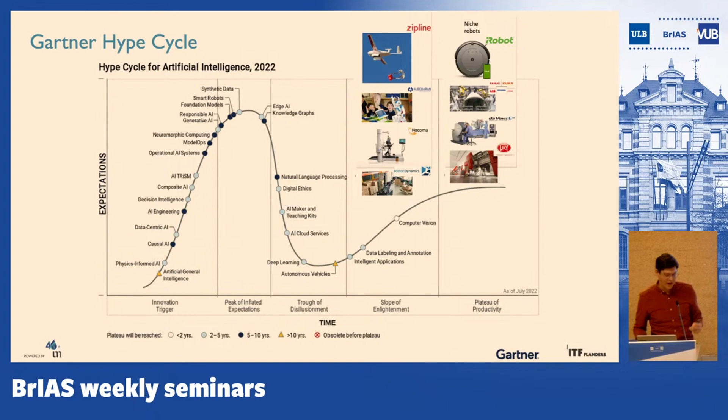And then on the plateau of productivity, I think this is niche robots that can do only one thing. And then you have robots that I think go more to unstructured environments, like drones for transport of things, education robots, exoskeletons for rehabilitation, also warehouse robots, which gradually start to be implemented more and more.

And in the disillusion valley, there I think also the autonomous vehicles are placed. When you see the predictions 10, 15 years ago, we would all drive with self-driving cars. Of course, there are huge advancements there, but I couldn't yet sleep in my car, of course.

But also exoskeletons, cobots, quadrupeds - I think we still need to see the true value of them in our economy and society. And now more and more you have the humanoid robots.

There are incredible investments in them. Hundreds, thousands of millions are now pouring into it because they see it after text, speech, images, videos - it's probably physical AI. And so that's really where a lot of investments are made. But I think it's really on the peak of inflated expectations.

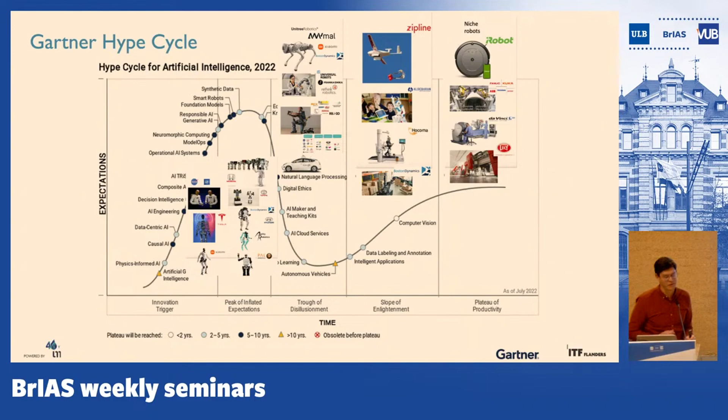So what are the core technologies in such a humanoid?

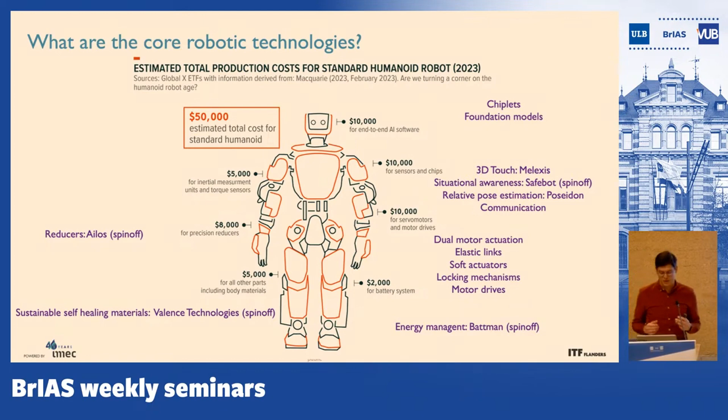So here you see end-to-end software which needs to run on chips. What's there? The foundation models, the chiplets, because we need new processing to make low latency, low power processing for sensors and chips, 3D touch - I'll speak a bit about Melexis - situational awareness, communication, but also servo motors, a big part of the value, the battery system, the body materials, precision reducers, inertial measurements, and so on. But of course, to produce that, you need very large multidisciplinary teams to develop it.

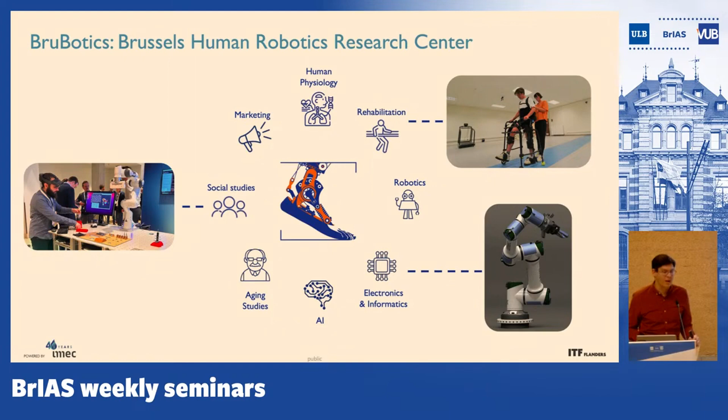That's why we developed at VUB Brubotics, a combination of different labs, like the AI lab, but also electronics and informatics, and our robotics research group. Because the combination with the human is important, we also introduced human, social, and medical sciences into it. This umbrella of different research groups, which before mostly worked on human-centered robots, has now expanded to sustainable robotics, working closely together in different teams.

Moreover, we're affiliated with Flanders Make, which is an institute for helping the Flemish manufacturing industry. I was part of Flanders Make until a while ago - now it's a colleague of our lab, Ilias - and I joined IMEC. Why? Because they're the chip research lab of the world, and I see a lot of opportunities that those developments will also end up in robots and have markets there. That's why also the focus on

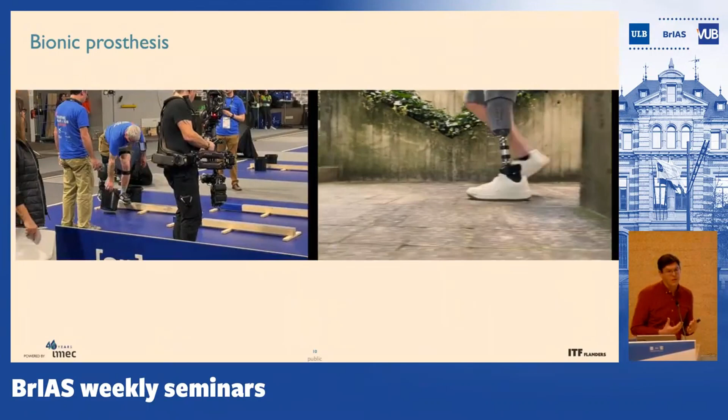core robotic technologies. I mentioned we're going to startups, and one that already exists for a few years was founded with someone from the AI lab, makes bionic prosthesis. There we started with the focus on how we can improve actuation technologies, because typically motors for robots are very rigid, very stiff, and how we can go beyond that and include the flexibility of the human body to store and release energy in springs, for example for bionic prosthesis. This is the company Axiles Bionics, who has the IP on the ankle, on the bionic foot.

Others in the lab are also working on the knee prosthesis, and here, for example, we participate in Cybathlon, which is kind of an Olympic Games for persons with a disability, helped with technology. Now we're also trying to transfer the IP of the knee towards Axiles Bionics. So here too it's development of hardware innovations, control of it, model-based control, but a lot we cannot model, and therefore AI is also important.

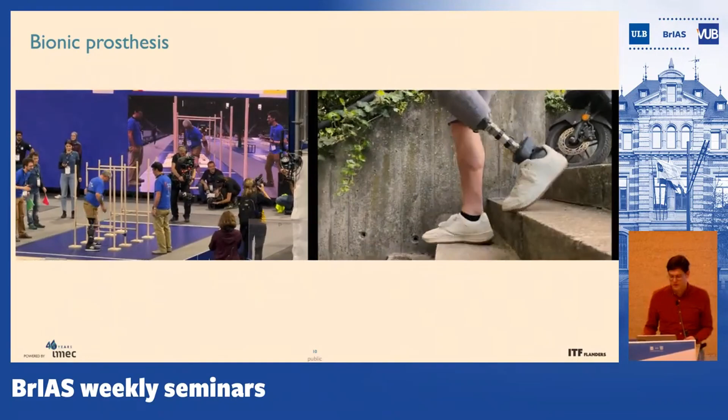Instead of replacing human limbs, we also try to augment human limbs - the so-called wearable robots, in this case exoskeletons, categorized into two main families. On one side you have the very passive devices - basically springs that store energy to pick up something, and that energy is released back into the human body to support it. But if you want to do other motions, they often hinder that motion, so they're not very versatile. On the other hand, you have powered exoskeletons, with batteries, motors, and controllers, which of course add weight to the human body.

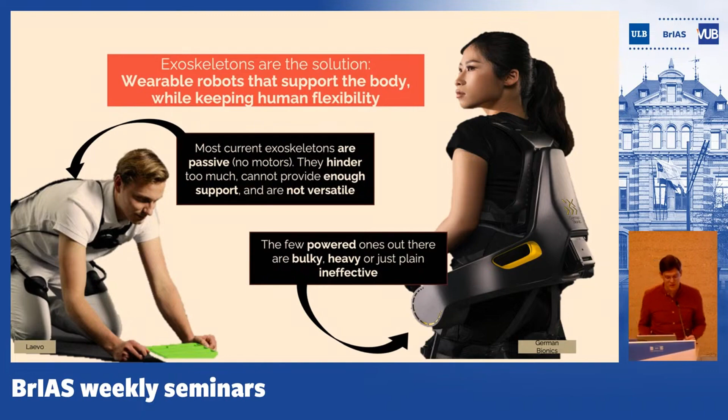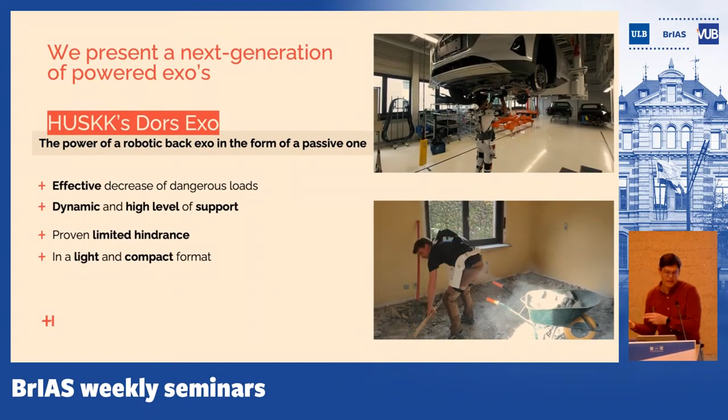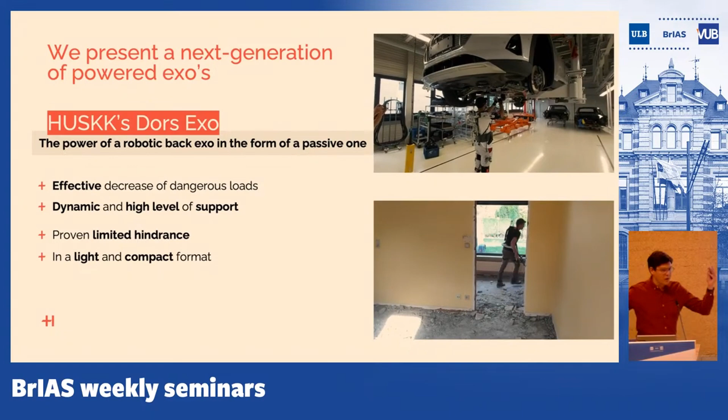But they're also very bulky and not very effective. That's why, similar to the prosthesis, we try to combine passive behavior - storing energy in springs - with active motors where needed, to make much more lightweight but also versatile devices. Here you see, for example, such exoskeletons for the upper arms. Think how painful it is to paint the ceiling of your room - but a lot of workers have to work, for example, under cars and so on, also to lift heavier objects. Here too we want to try to make a spin-off company out of it, called HUSKK.

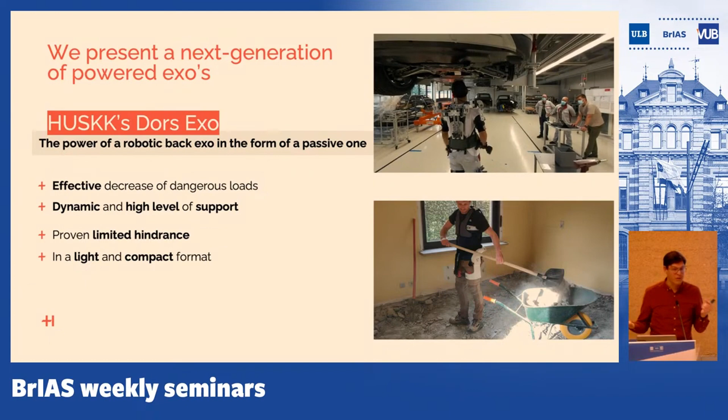But it's hardware, and hardware is hard - it takes of course much longer time to market than software. On the other hand, there is IP involved, which has value. And that is, of course, challenging - we need quite some investment money to bring this to the market. So hopefully in a few years we can realize this.

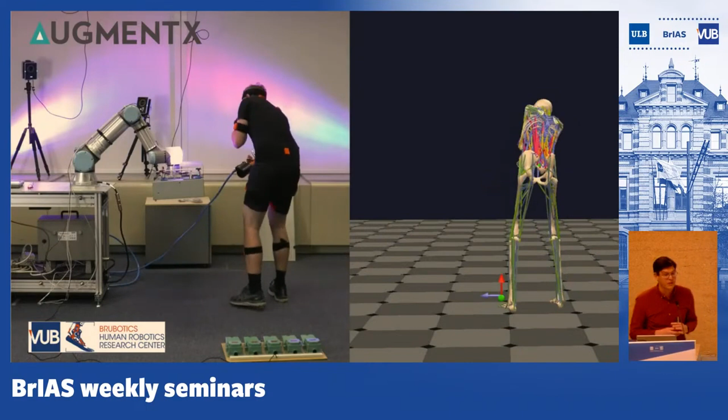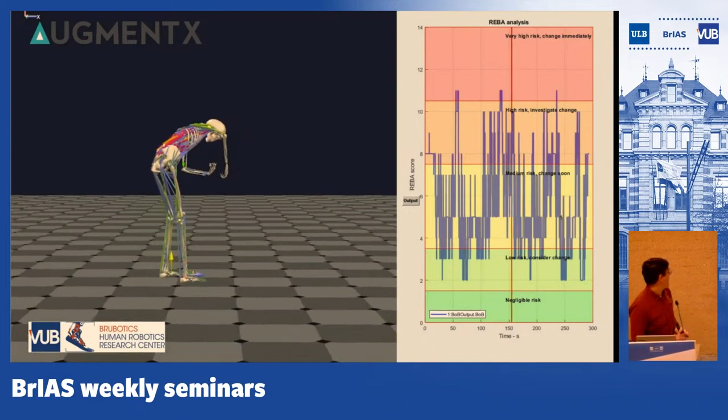Of course, to test our devices, we need labs to do that, to understand the impact on the human body with human physiologists, but also the social acceptance of those exoskeletons - that's also why we work together with sociologists on it. We have about a €1 million lab supported by Flanders Make, with motion capture systems like Vicon, but also wearables, insoles, force plates, and so on, so we can objectively investigate the impact of different exoskeletons, but also cobots, as you see here, on the human body.

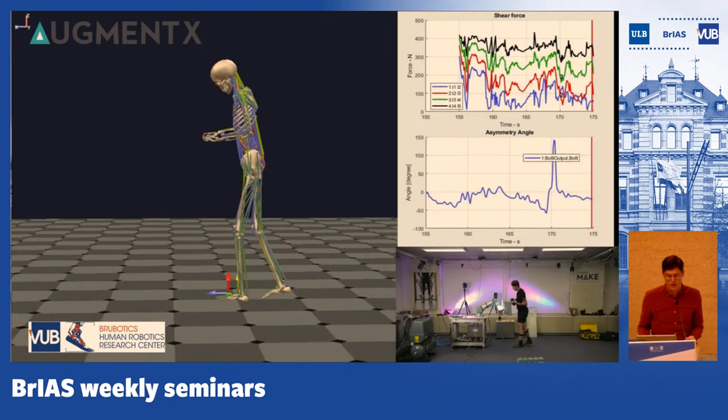So in the drivetrain, we investigated a lot of locking mechanisms, springs, and so on, but also the gearbox is an important component, and Pablo is in the room who leads this venturing effort in order to make exoskeletons. But let's watch the video.

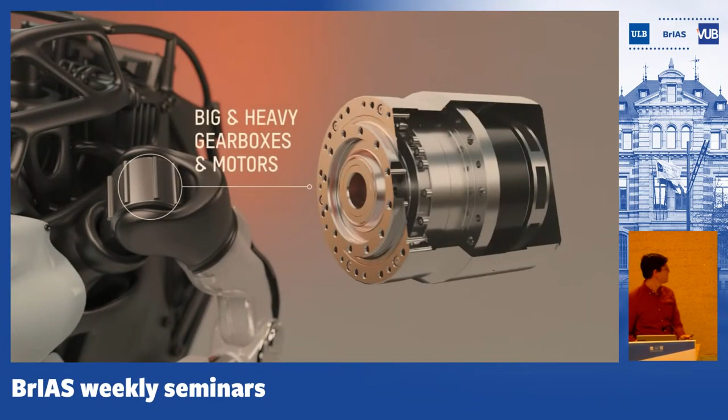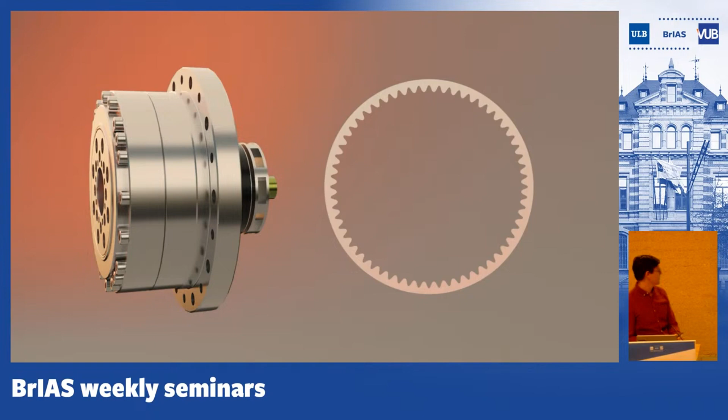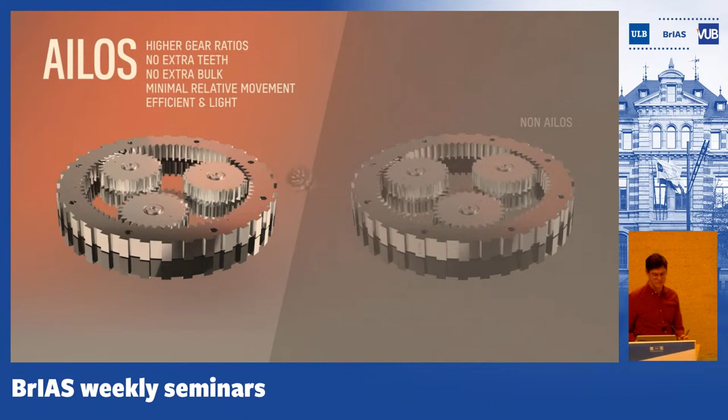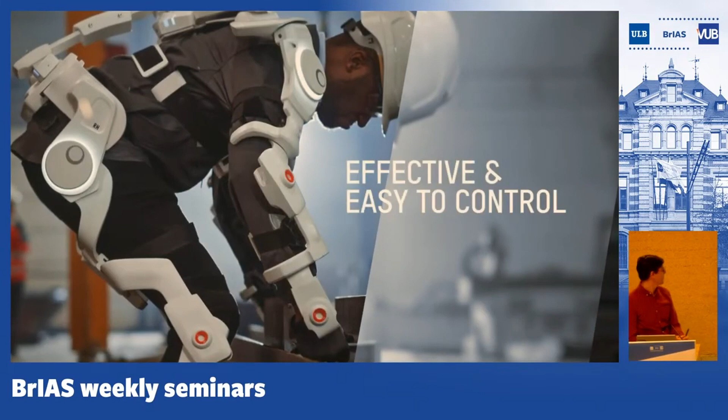And this is the pinnacle of what robotics engineers can build today. What's the problem? Today's robots require big and heavy gearboxes and motors to move around. This is known as the hardware problem of modern robotics. How can we make motors smaller? One way is to put more teeth in the gearbox to increase its gear ratio. However, this makes the gearbox clunkier. On the flip side, if we try to shrink the gearbox instead, we just end up with a huge and heavy motor again. At AILOS, we've re-engineered a gearbox with a uniquely efficient planetary movement. Thanks to its novel topology, our gearbox produces higher gear ratios without any need for extra teeth or extra bulk. Our patented technology also minimizes relative movements inside the gearbox, making it more efficient and even lighter. The AILOS gearbox cuts the weight of the motor gearbox duo by 30%, ultimately making the robot up to 50% lighter. The result is an effective and easy-to-control robot that's eco-friendly and truly beneficial. AILOS, shifting robotics into higher gear.

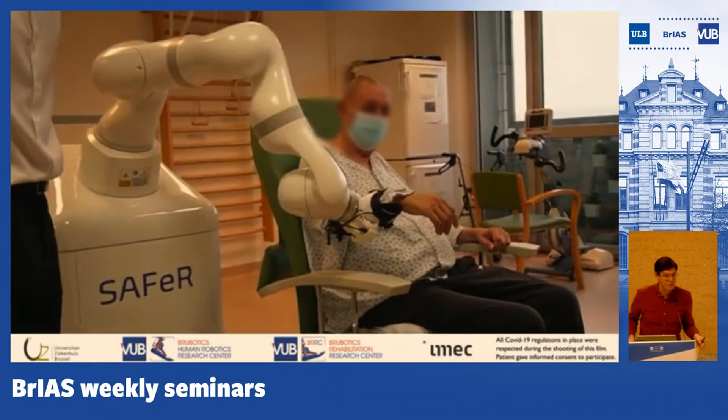So apart from actuation, we also need to improve sensing. For our exoskeletons, we need to know the intention to move. Because if I want to lift something that is far too heavy, measuring only positions won't be enough for it to move. So I need to go to the origin of that motion, which is my brain activity, but that's very difficult to measure.

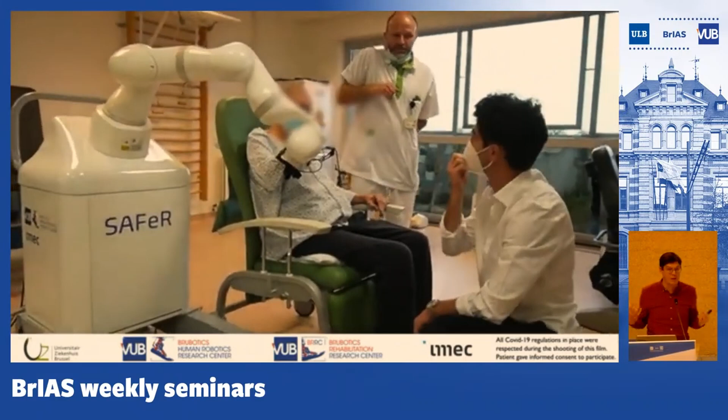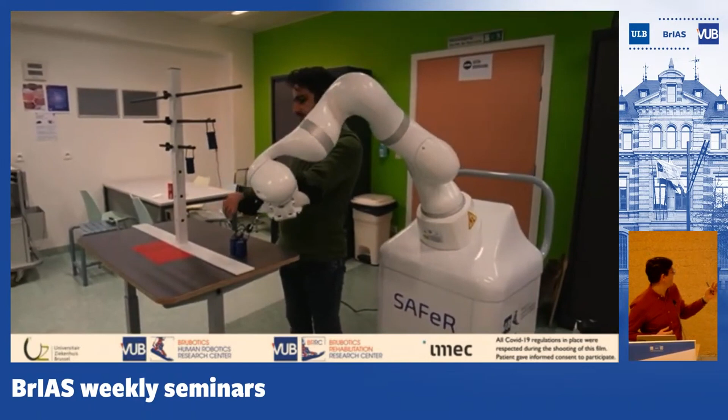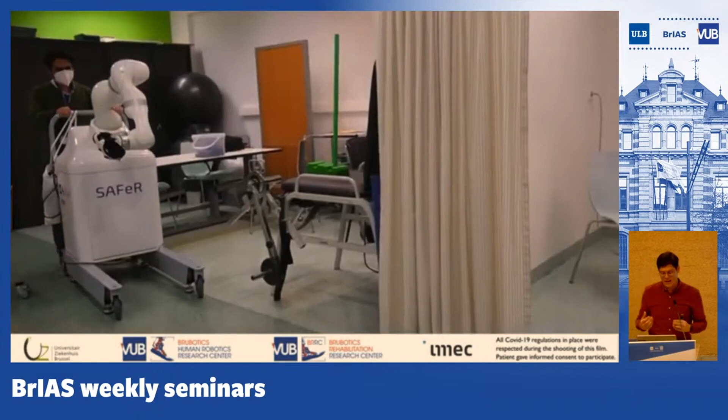Then, of course, it's about looking at how the muscles behave. That's why we have a sensorized interface with EMG, but it is very noisy data that comes early, and we combine it with pressure sensing, which is cleaner but comes a bit later. Like that, we can detect the intention to move, because if we use a rehabilitation device like a cobot that just moves the arm around, the patient will not rehabilitate. So we need to see the intention of the user to move, and then we can assist with precise impedance control, adding extra energy into the system in order to move.

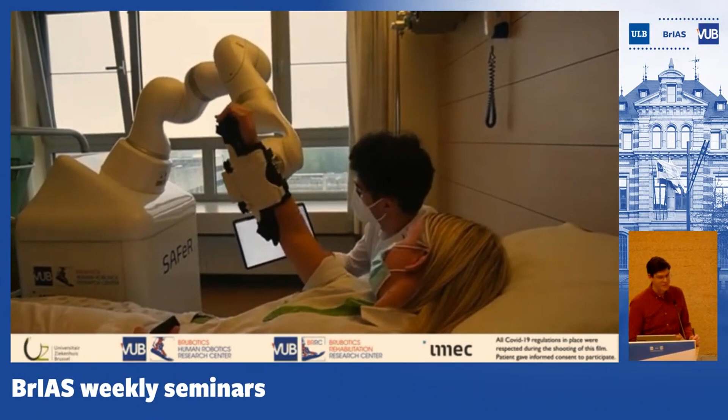So this was a finalist for the KOKA Innovation Award, and we wanted to create a company out of it. But first of all, the medical robot is still very expensive. The reimbursement of physiotherapists is challenging in Belgium. And it's a long time to market because it's a medical device.

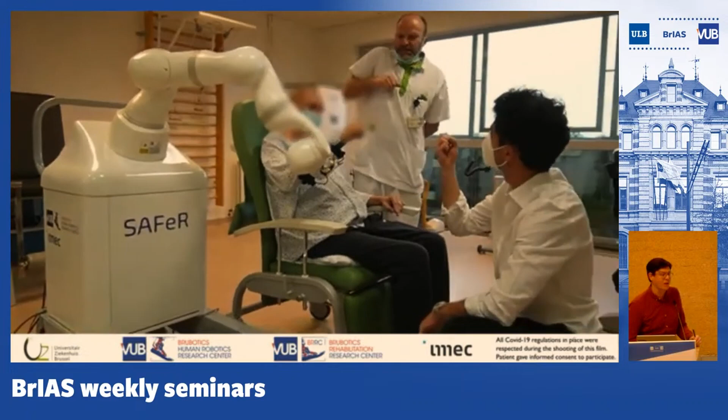It needs all the certification, and investors are not so willing to take that risk. That's why the company pivoted to sports injury detection, creating sensorized sports garments. From the field, we can track not only the motions but also the muscle activities. The idea is to target elite sporters because they have a medical team around them who can help interpret the data, so that we can gradually also move to recreational sporters, who of course don't have a medical team around them. This company has been founded a few months ago.

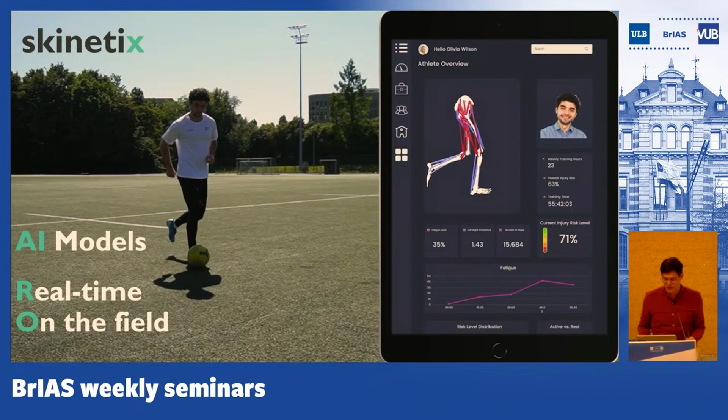We also work together with Melexis, a Belgian company that makes very interesting sensors for a lot of cars around us. But of course they also see those new markets in robots. And robots need to go into physical interaction with the environment. A lot of AI focuses on vision, but our biggest organ is our skin, and our skin is super important to interact with the physical world.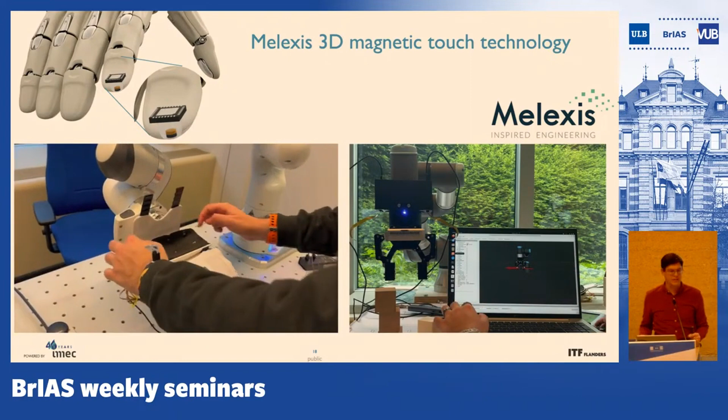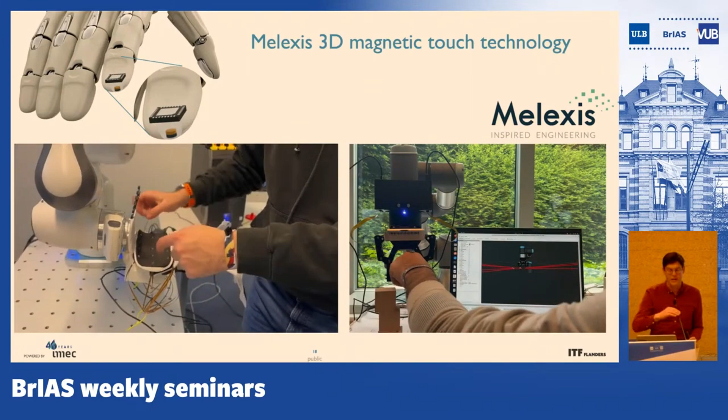And so there we also are experimenting with reinforcement learning to see how much pressure we exactly need to lift up objects. And I think such information is fundamental also for foundation models, that we not only train on vision, but also on touch interactions. So when I see something and I grasp it, that I can react to this.

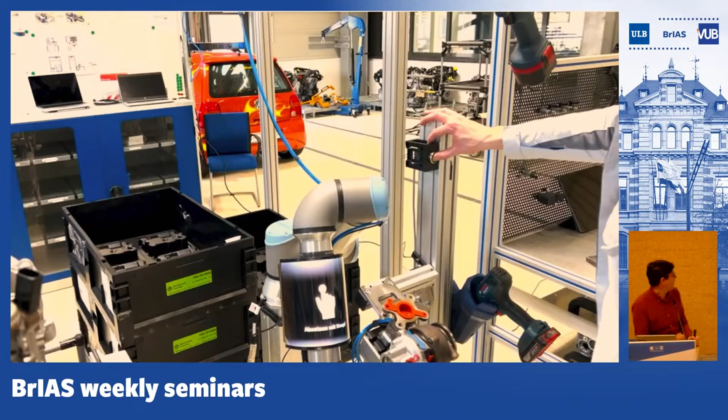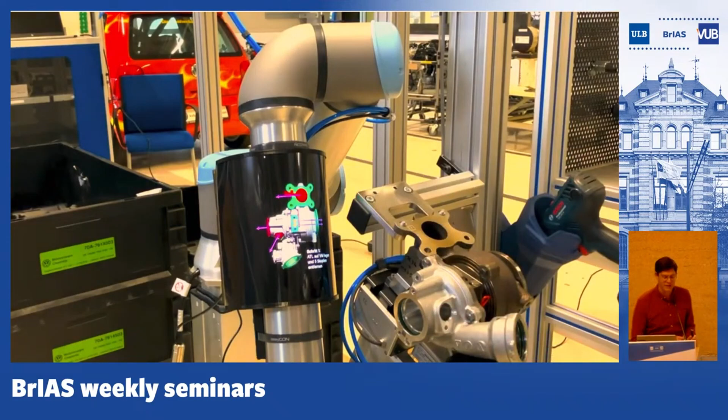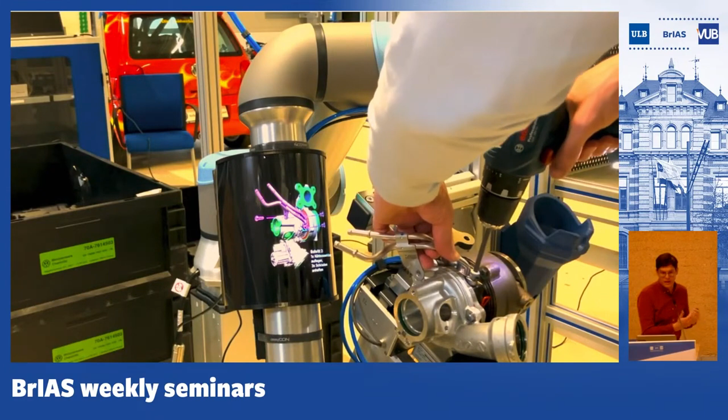So we were part of a European project to improve ergonomics of workers with exoskeletons and cobots. One of the implementations we did was with Volkswagen, where there is this 14 kilo turbocharger component. Imagine a worker the whole day taking 14 kilograms, so very bad for their back. Also in industry you have the case that all products have small variations, and that's why we also have a screen on top of it that informs the worker which operations, which task he or she has to do.

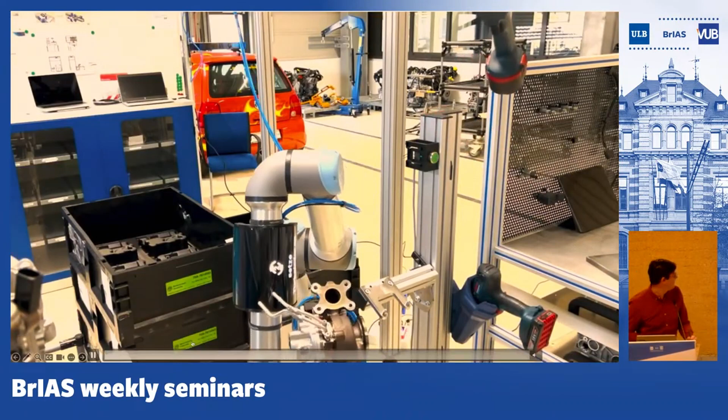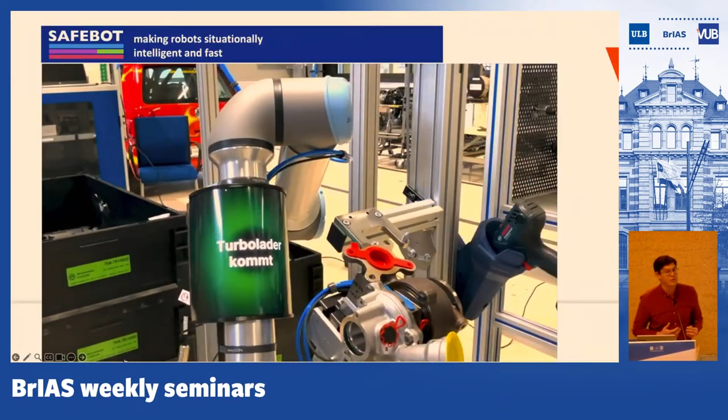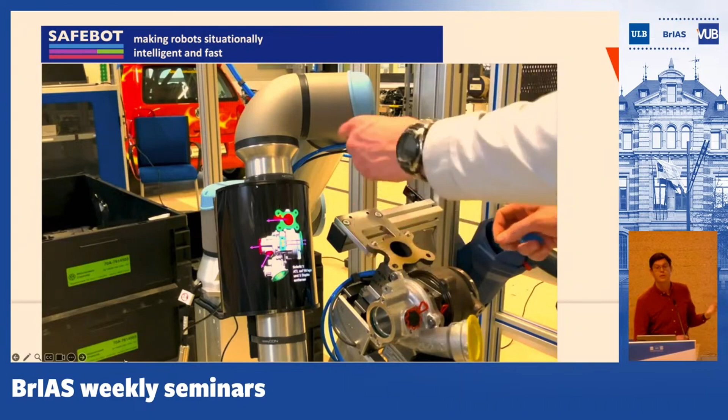So it was a nice, successful demonstration, but it didn't end up in the production chain. Why? You see here in the beginning, the robot moves extremely slow, so it cannot reach the takt time in the production facility. So two thirds of the robot developments, they fail due to speed. Of course, you can say, okay, let's move much faster, but it's dangerous because a human can be there.

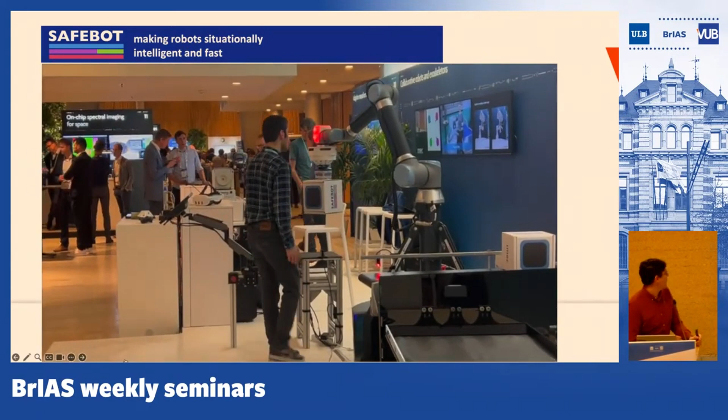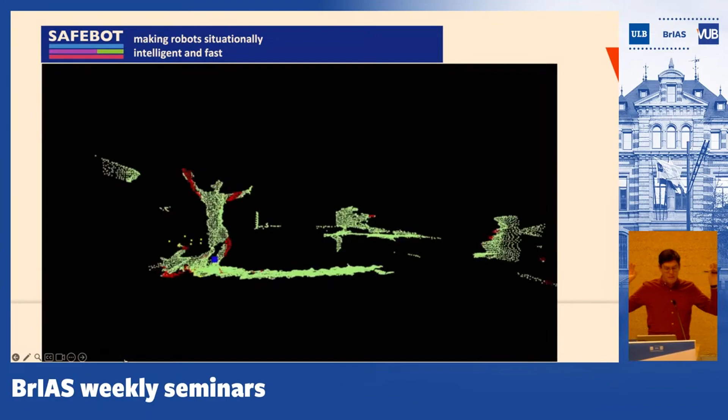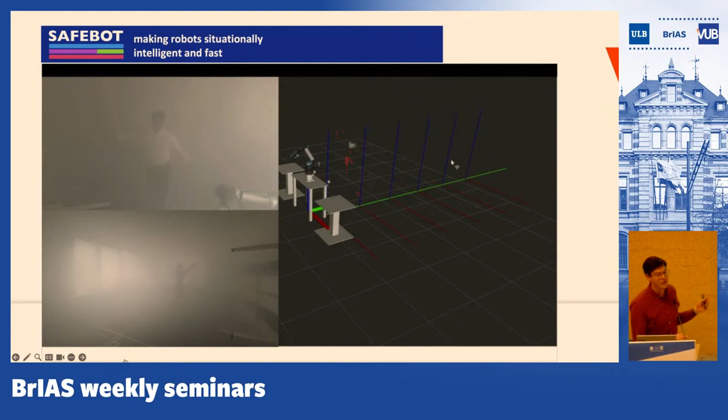And that's why we're also making a new venturing effort with Konstantin leading it, where we have a multimodal perception pod at the end effector, creating an occupancy map around it, where we want to go close by to cube centimeter resolution. We also combine different sensor modalities so that even in different environmental conditions like fog, rain, and so on, we can see through it.

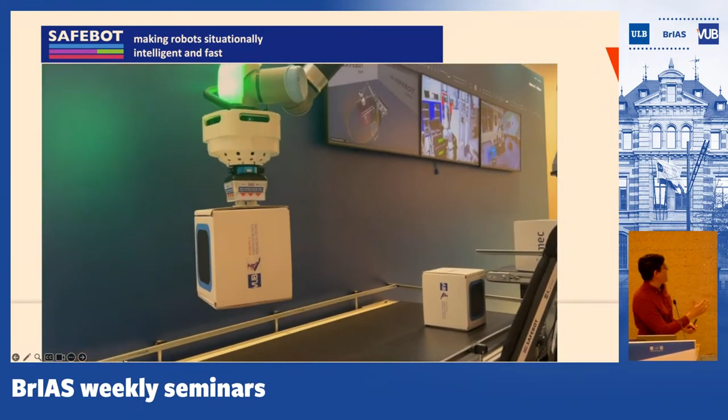And then we also have a digital twin, and you see when there is nobody around, the robot can move at full speed. It's not yet certified, so we were not allowed to go full speed at this fair. But you see when someone comes closer, the robot slows down and then finally stops.

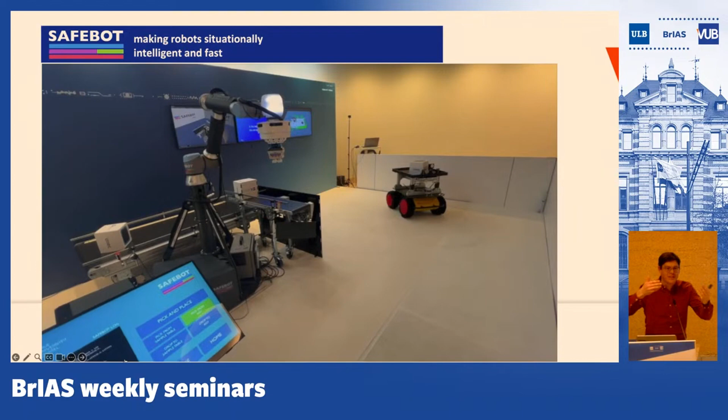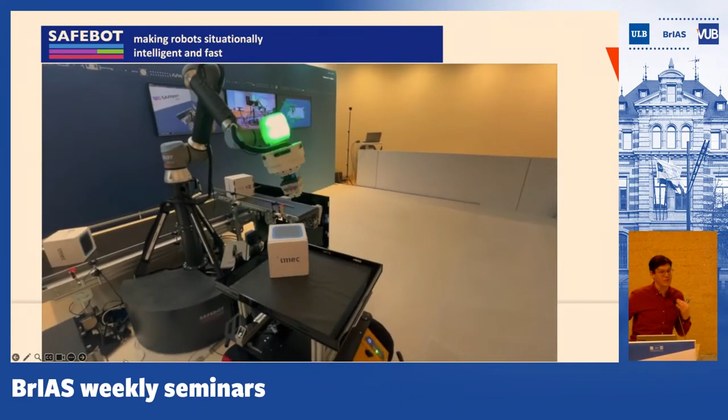And so latency, like Jan mentioned, is super important, and that's why we're also now working together. Of course, this is one agent having a perceptor ring, and we cannot share our eyes there, but robots with a communication system can potentially do that. So how we can combine the occupancy maps of different agents, and then, of course, bandwidth, latency are super important. So that's what we're trying to do together under this BrIAS part.

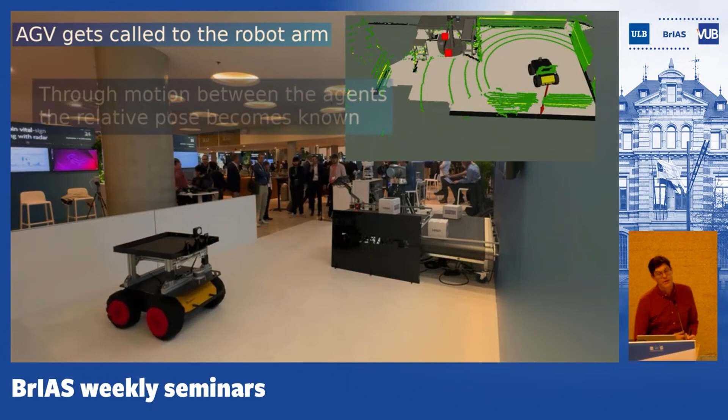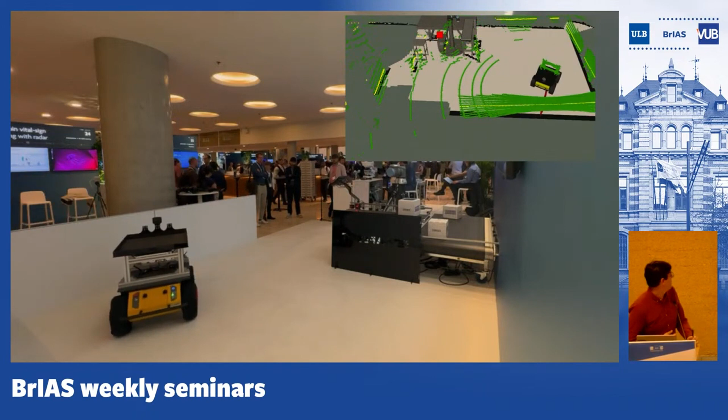And then, of course, when robots need to work together, we also need to know where it is, and that was also the motivation for my last question to Jan. Indoor you don't have GPS position, so how can you know where the robot is? Then you can use SLAM, as in simultaneous localization and mapping. But in many environments, the number of features is not enough to have a reliable position.

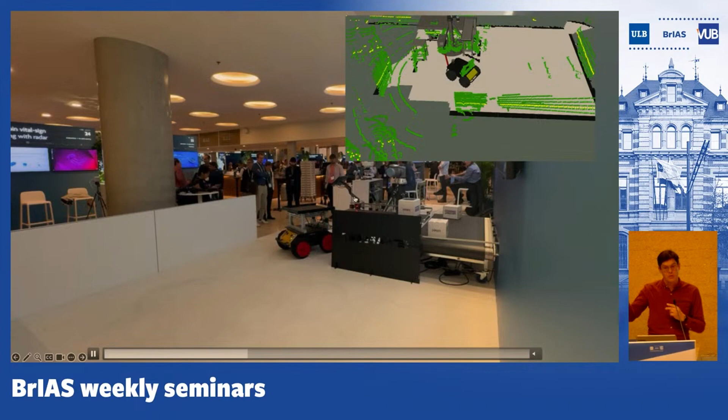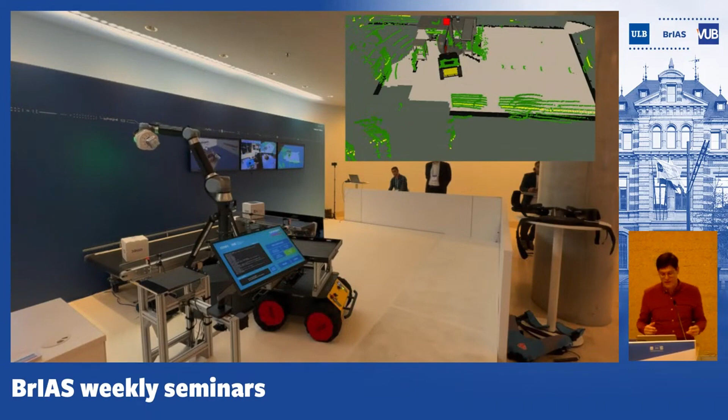And that's why we're working in this case with ultra-wideband localization. So the agent, only with an ultra-wideband anchor on the robot and on the place where it has to go, it knows where to go, and then it uses its lidar to do obstacle avoidance and so on. And so maybe in the future we can combine communication with this technology in order to know the relative pose of the different agents in the environment.

Another aspect is battery management. During Corona, my laptop died because it was always fully charged. So now I have a program on my computer that limits the maximum charging rate, because anyway I don't need it. Maybe when I go to the United States, I want to work on the plane for 8 hours, and then I need the fully charged batteries. On the other hand, the battery just degrades when you fully charge it.

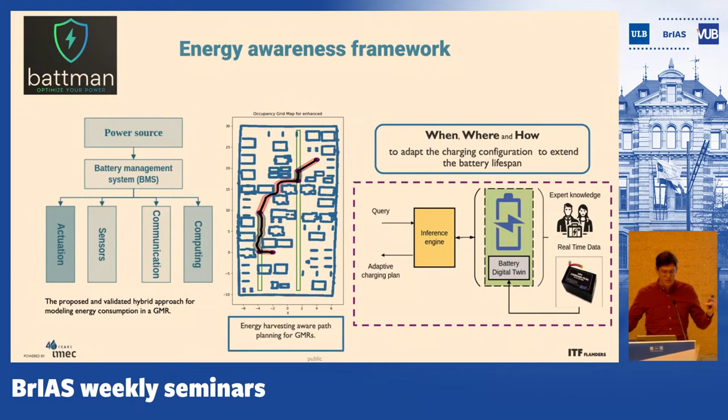And that's why we're also working on a spin-off company, hopefully, that can monitor this, because the system knows which are the different paths that the robot needs to take, how we can optimize the charging so that there is a longer lifetime of the batteries.

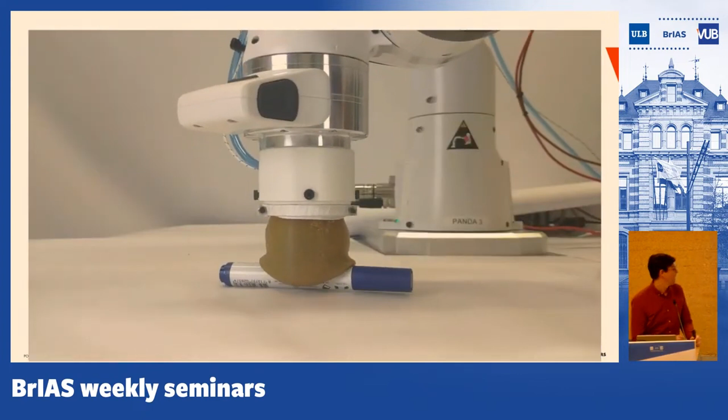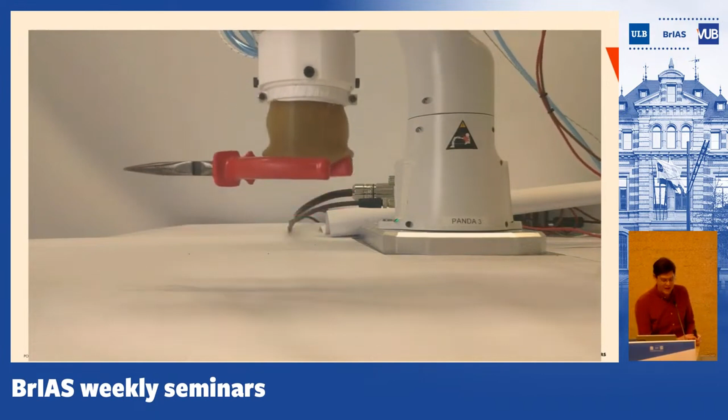Another aspect is the materials of the robot. Our robots are very complex, and when broken, it's very lengthy repairs, or you throw it away, which adds to the increasing e-pile. And so we use also more and more soft materials. For example, this is a very simple gripper, which is a balloon, and you make it stiff by creating vacuum, and then you can pick up objects.

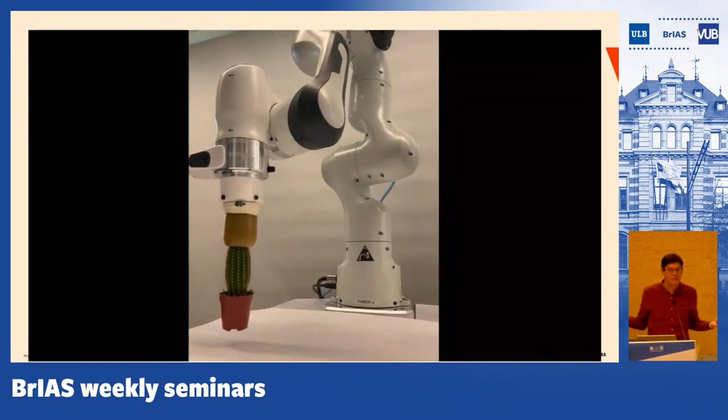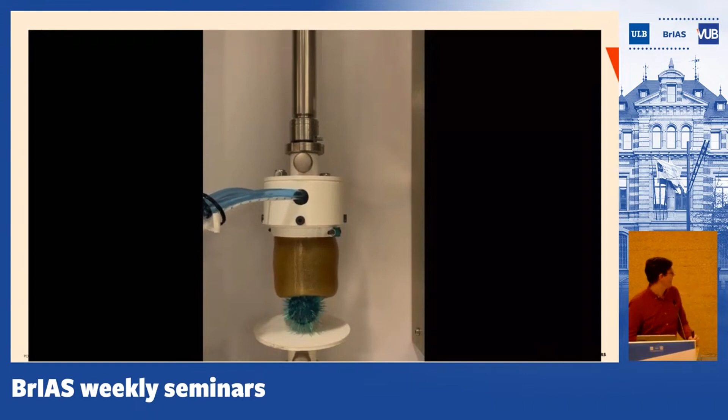But same like the human body, we are not over-dimensioned, we don't have very strong materials, but when we are injured, we can often repair our wounds and fractures, and we thought maybe we can also bring that into materials development. That's why we started working together with the materials, the polymer department of the VUB, to create self-healing materials.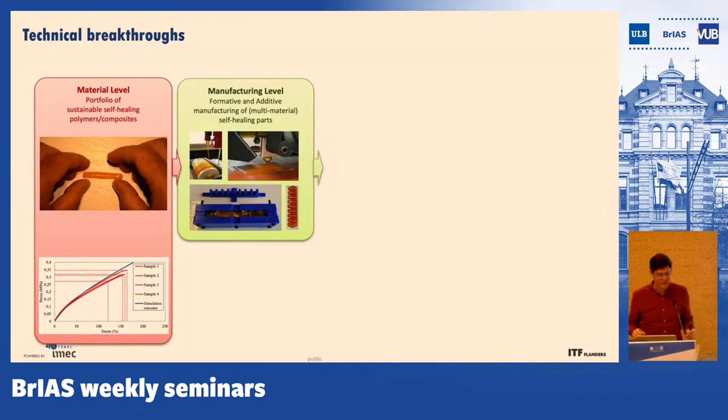And so we need to innovate the complete value chain. So we have a portfolio of materials which can be stiff and rigid. We can mold it and print it, which is exceptional because it's a network polymer. Like a tire, you cannot print again, or you cannot even recycle it, because that network is fixed. We can, with the conductive self-healing materials, also embed sensors in it and also have a heating network in it.

But we also innovated materials so that they can heal at room temperature. So here we cut the material, and a few seconds later it's healed enough to go back into action. But of course we don't have control of in which environment it's healed.

So if it's dirty, then you have the problem that in the scar there are particles, and that's why we also developed heating elements in the soft robot that you can, for example, clean it, you send a current through it, it heats up, and it can heal.

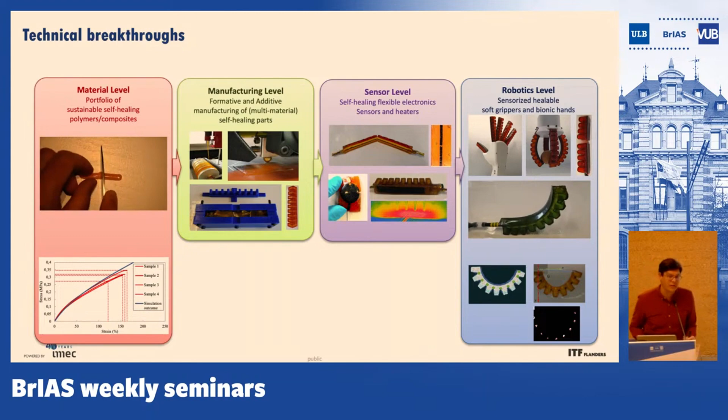Moreover, we also made multi-material parts, because if you look at our human hands, we have stiff materials, like rigid materials, like nails and bones, but also more elastic, and they're perfectly combined. But if we combine different materials, we need to screw them together or glue them together, and often there are the stresses - where are the failures? But we heal them together, so the interface is perfect.

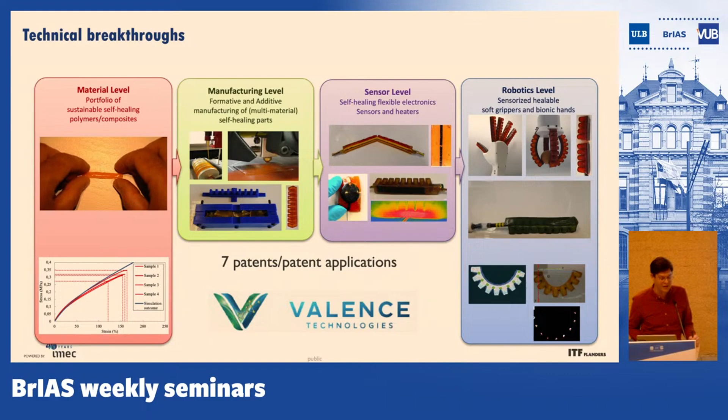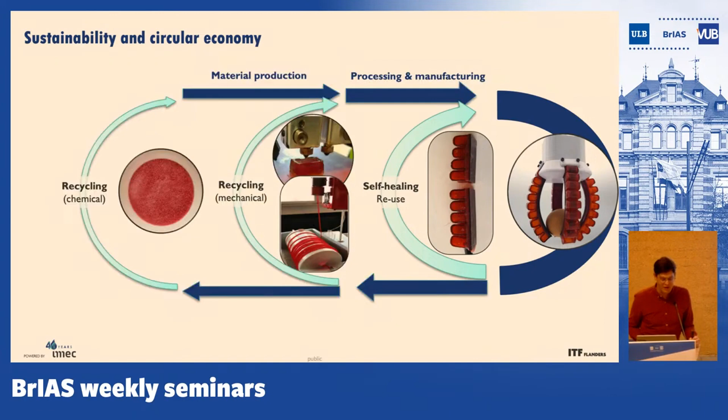And so we have 7 patents on it, and also recently we created a spin-off company, Valence Technologies, as a platform technology, which is sustainable materials, because when damaged it can heal. Moreover, you can chemically and mechanically recycle it. We're using biosources, and we're studying biodegradation.

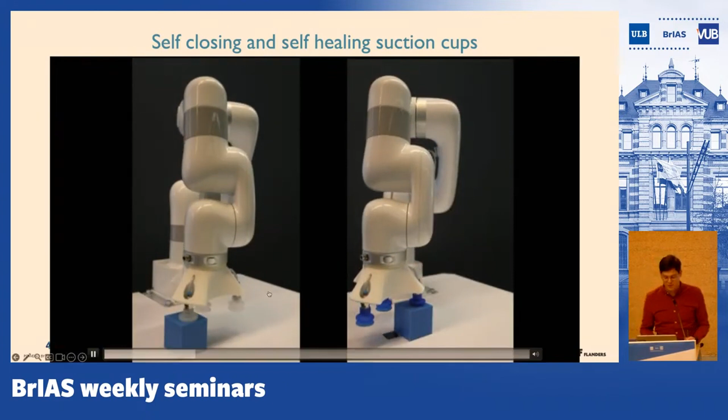Moreover, we also made a new innovation that we have self-closing suction cups. So when not all suction cups are in contact with an object, you cannot create enough vacuum and you cannot pick it up. But our suction cups, due to the design, close themselves, and so you can pick up a more wide variety of objects.

So how do you create technology that goes from very low TRL level to valorization? Yeah, for that you have the technology readiness level. 0 or 1 is an idea, and that's where we have our very fundamental projects like ERC grants, or also for the self-healing we had a FET Open, which is now called EIC Pathfinder, which is blue sky research.

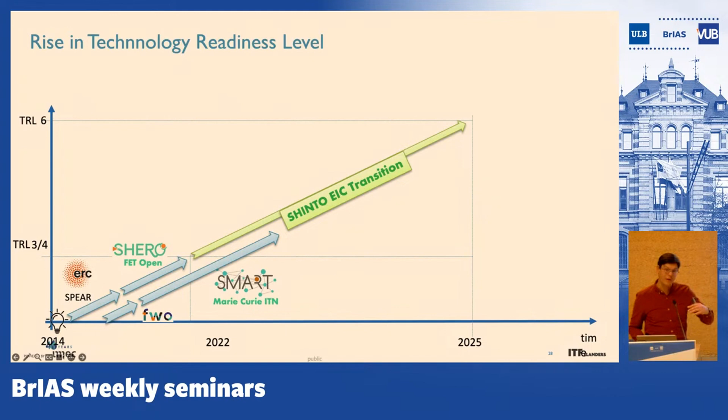But then you end up with TRL 3, nice lab demonstrators, nice papers, but then the valley of death happens, because for an investor it's still too risky, and for the research part, yeah, most of the innovations are done. And then we were very lucky to have an EIC Transition, where the ideas do on one side the business aspects, and on the other hand, maturing the technology. And so that's how we can overcome this valley of death towards a spin-off creation.

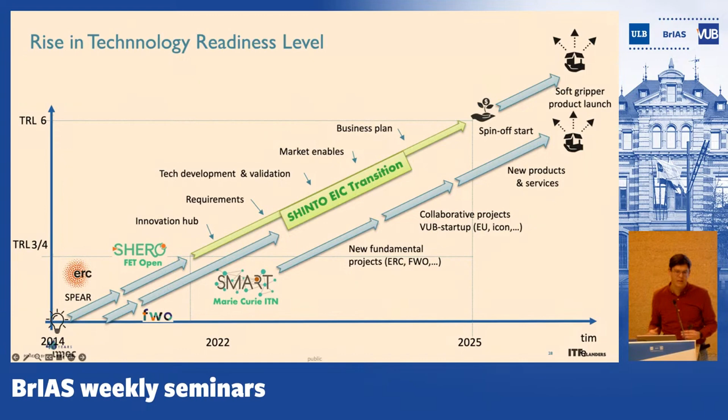So now we're applying for an EIC Accelerator grant for the spin-off. And of course, it's a platform technology, so you can go to much more markets. And so that's why we're developing parallel projects to go to new markets. For example, we're studying self-healing medical phantoms to do surgical training.

And how we do IP management, yeah, it's also, I think, a challenging thing. So, of course, for spin-offs, often they need patents, because that's, of course, something of value for the investors. Some things you also need to keep secret, because, yeah, all the processing parameters are difficult to patent, but throwing them on the street is also not so interesting.

But on the other hand, those technologies need to be used in applications which are beyond the capabilities of our lab. So that's why we also make tutorials, open source control, where we, for example, had a tutorial paper, how to use our materials, so that it can go beyond applications, beyond our capabilities.

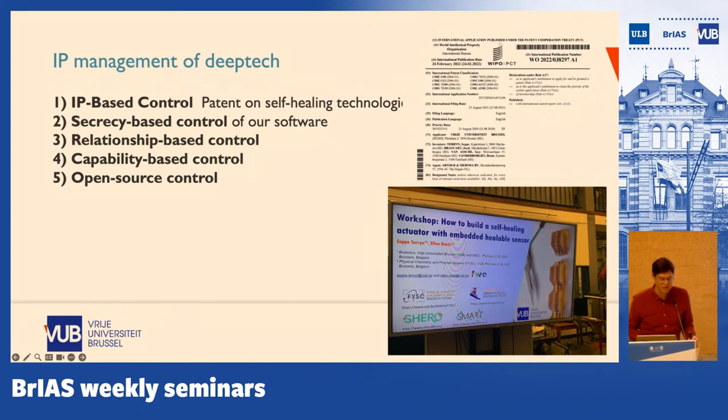I think it's also very important to do VOCs, voice of the customers. In the beginning, we develop our technology, and then we think, maybe it's nice to make a spin-off company. But the needs of us as researchers want to add more and more complexity and cool things, but that's not what the market needs, because they need cheap products, robust products, and so on. And so instead of doing the VOCs at the very end, when basically your research money is burned, we try now to do it much earlier in the process.

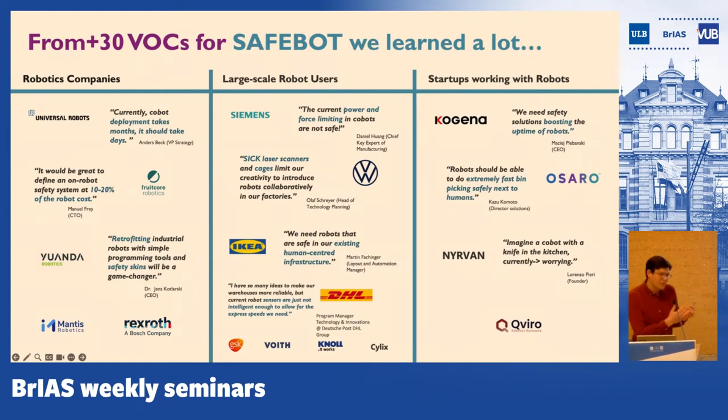So, for example, SafeBot, the researcher, started with doing a lot of voice of customer work with a lot of companies to understand their problems and needs in order to develop a product targeted on those needs.

I think it's also important not to try to conquer the whole world at once. What you see now, the markets for humanoids are billions of euros, and you think, wow, I will enter it. But of course, there are the big sharks.

So I think it's better to go to a beachhead market. The idea comes from World War II: first you land on a quite safe beach with not a lot of competitors, and then you gradually take different parts of the market. Now we are developing all those different startups.

But if you look at Denmark, Switzerland, the Netherlands, and compare the number of robotics companies divided by millions of inhabitants, we see Belgium is behind. That's why, if you have an ecosystem, innovations can accelerate.

You share talent. Maybe one company goes bankrupt, but that person has a lot of talent, so can you not reuse it or give them a different role in another company? You can even reinvest money. That is exactly what we want to do in the robotic startup hub in Zellik.